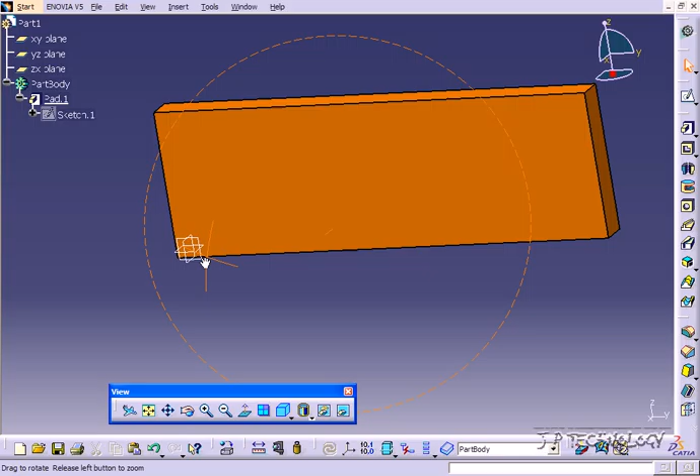So in this case, what we're going to do is we're going to cut into this plate, and then we're going to use the edges to pattern along, and then we're also going to create a sketch, so just one sketch line across here, to also pattern along. So to start off, let's create our first feature.

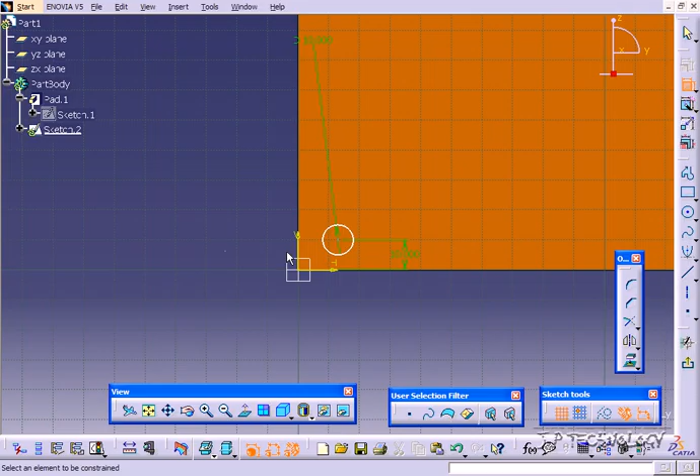So let's click this face, click Sketch, and let's sketch a circle. So just click, sketch a circle in the middle, and let's dimension this to 10 millimeters. And let's position it in the bottom left corner, and we'll dimension it to 10 by 10 from the edges. So from this edge to the middle, make it 10, and from the vertical edge to the center, we'll make that 10 also.

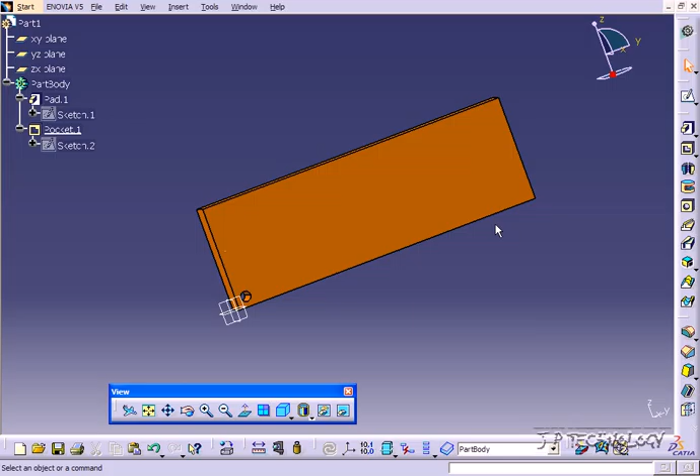So now that we have our sketch, let's exit the workbench, and now let's use the pocket feature to cut it out. So click Pocket, click the sketch we just made, click OK, and now we've made our first feature that we're going to use to pattern. So we're going to take this feature and we're going to pattern along this edge here, and that's going to be our first pattern. So let's click Insert, Transformation, Rectangular Pattern.

So now we have the rectangular pattern definition box, and you can see that we have a few things we need to fill in right now. So the first one I'd like to put in is the object to pattern. So click on there, and you can either select by clicking on it in the part or clicking on it in the tree. And I think clicking from the tree is a lot easier because you won't be clicking on another part by accident, and it's a lot more precise. So let's just click the pocket.

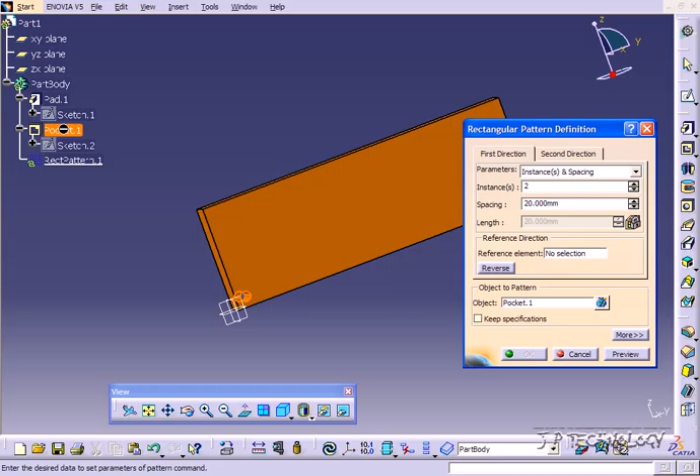Now for the reference direction, we're going to have to choose a line to pattern along. So we're going to do the bottom edge here. So let's click this bottom edge here. And you can see that from the rectangular pattern and the settings that are already in the definition box, it's made another feature right beside it.

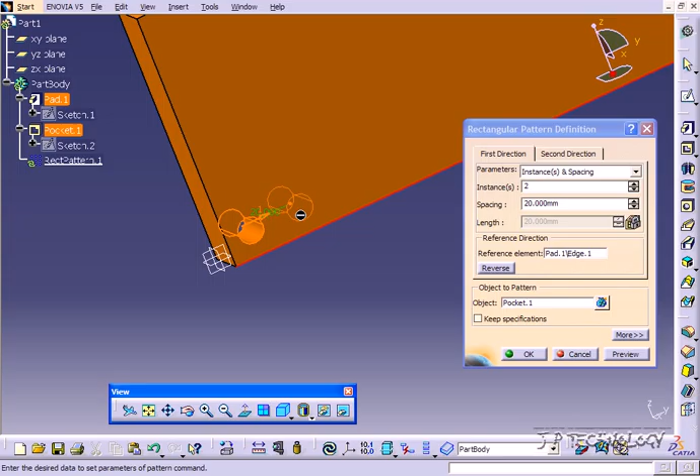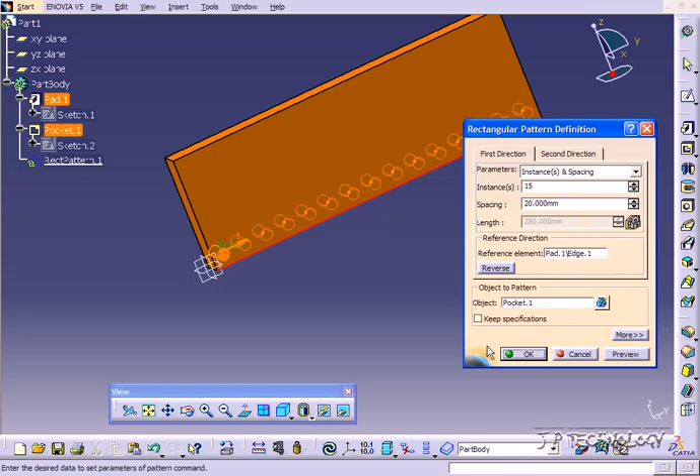So right now the instances are at 2, and what we have to do is keep going and increasing them. As you increase the instances and the spacing between each instance, the pattern grows. So let's put this to 20, and let's make 15 instances. Click OK, and you can see that it runs all the way across. Click OK again, and now we have our 15 instances, and we have our rectangular pattern going along the bottom edge. Now let's do the same thing, but let's go on the vertical edge here.

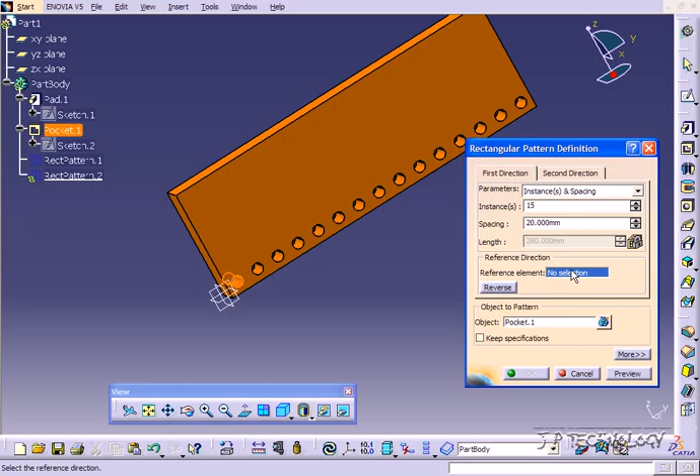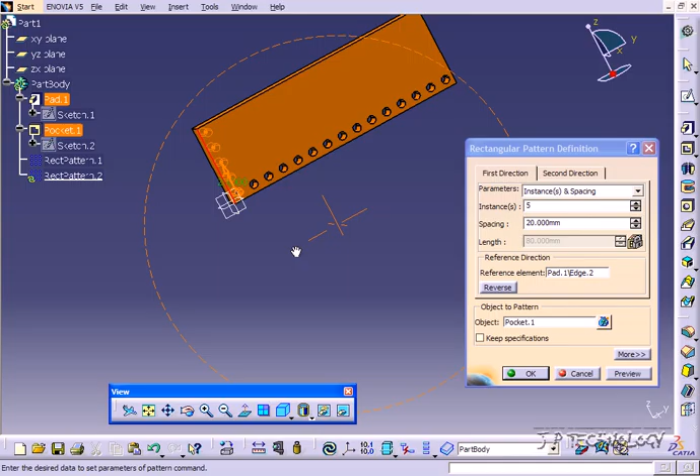So let's click Insert, Transformation Feature, click the rectangular pattern. Now let's choose the pocket again, and let's choose the reference direction. We'll choose the vertical edge here, and you can see right now in the preview it's going in the wrong direction, so we're going to have to flip it. So you can either flip it with this arrow or flip it with this reverse button. So put it in the right direction, and we're going to need 5 instances. Click OK, and you can see the preview looks good. Click OK again, and now we've done it going on the vertical edge.

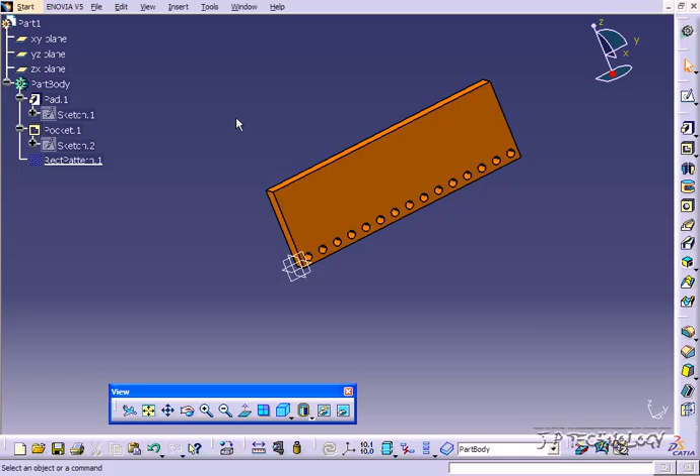Now if we delete this rectangular pattern, we can actually pattern an existing rectangular pattern also. So we're going to pattern all of these going up to fill up the whole plate. So let's click Insert, click Transformation Feature, Rectangular Pattern, and our object to pattern is going to be the first rectangular pattern, and the reference direction is going to be the vertical line.

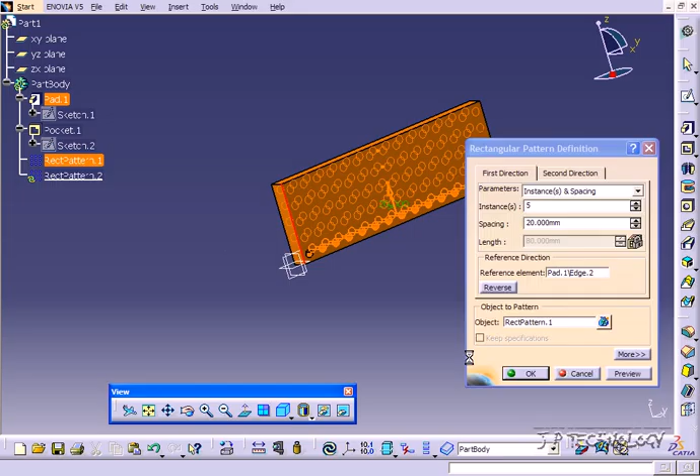Let's reverse the direction, and it looks good. Everything's in the right direction, everything's cutting in. Let's click OK, and now we've cut into the plate using the rectangular pattern. So we've patterned an existing rectangular pattern to fill up the whole plate. Now let's delete both of these patterns.

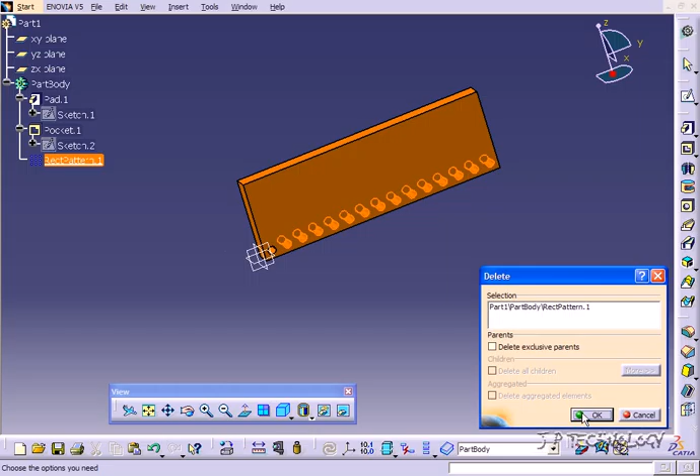And what I'm going to do is do that exact same pattern that we just did, but we're going to do it in one step. Click Insert, Transformation Feature, Rectangular Pattern, and let's choose the pocket.

Now let's choose the first direction, so we're going to make it go along this line. Now we're going to be choosing the second direction. In the first ones that we've been doing, we've only been doing one direction. So you also have the option to do two at the same time. Let's click the second direction.

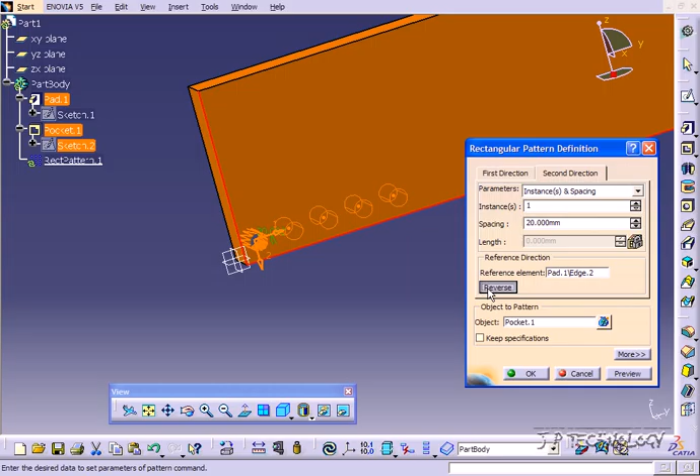And let's click this line here. We'll just reverse it and increase the instances to 5 so it goes all the way up, and we'll put these to 15. Click Enter, and you can see that just with one single rectangular pattern, we're able to go horizontally and vertically and fill up the entire plate. Now let's click OK.

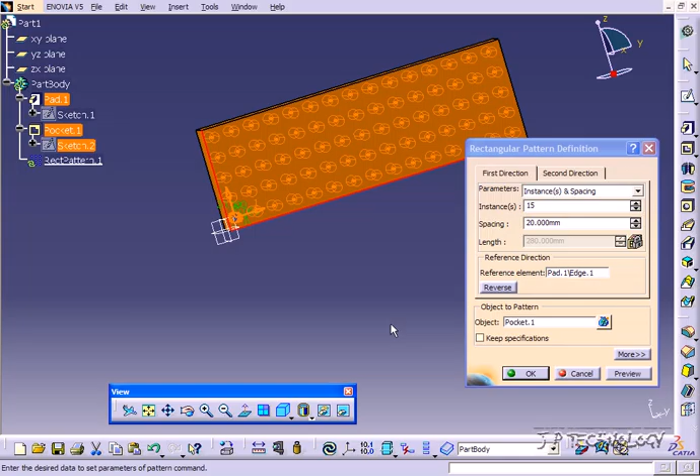And now we've done our rectangular pattern. From one feature, we've created multiple features on this one plate. So from the one feature, we've been able to use the rectangular pattern and pattern the entire plate.

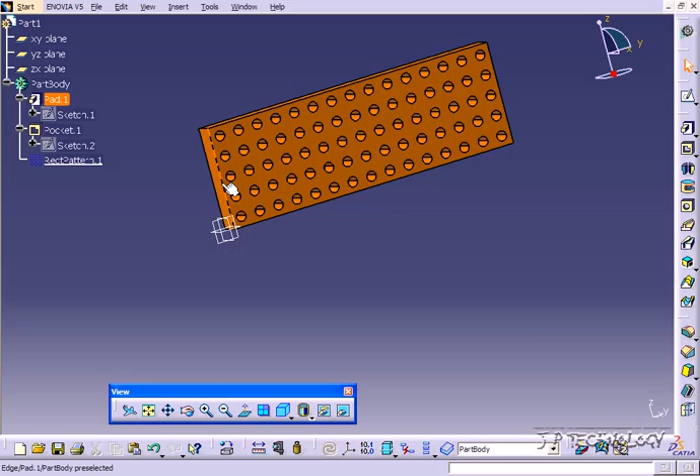Now, right now, all we've been using is the edges of the rectangular plate. So let's delete this rectangular pattern, and let's use a sketch as our definition line, so our path to follow. Let's click this face, click Sketch, and from the origin,

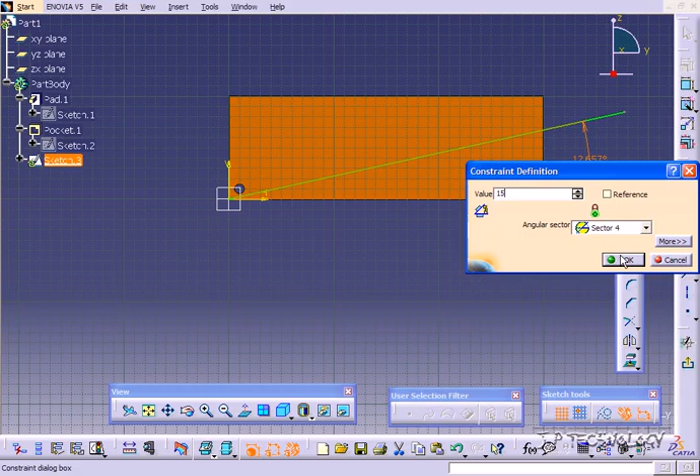let's just draw a line straight out, and let's dimension this with an angle. Right now it's at 12 degrees, so let's put it to 15 degrees. Click OK, and let's exit this workbench.

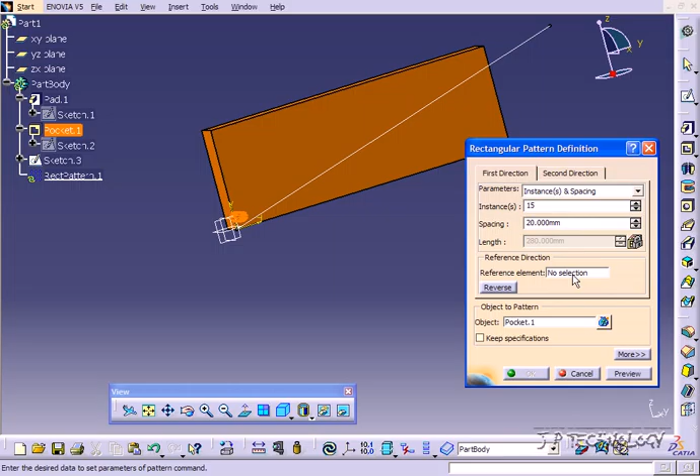Now what we're going to do is pattern along this line here. So let's click Insert, click Transform, Rectangular Pattern. Now we're going to select our pocket, and our reference direction is going to be this line here.

And you can see that rather than following a straight line, kind of like on a 90-degree angle, what we're doing is following this line that's on the 15-degree angle. Now we'll click OK, and we've made our pattern on an angle.

Now these angles, they have to be a straight line. It can't be a curved line, so it's not going to follow that. With the rectangular pattern, it's only going to follow a straight line.

Now we're also able to edit the sketch of the line. So by moving this line, it's going to move the pattern when we rebuild. So let's double click on the line.

Double click on the sketch, and let's change this to 20 degrees. Click OK. Now when we rebuild, everything with all the circles are going to follow this new line rather than the 15, and you can see how it's adjusted and moved up there.

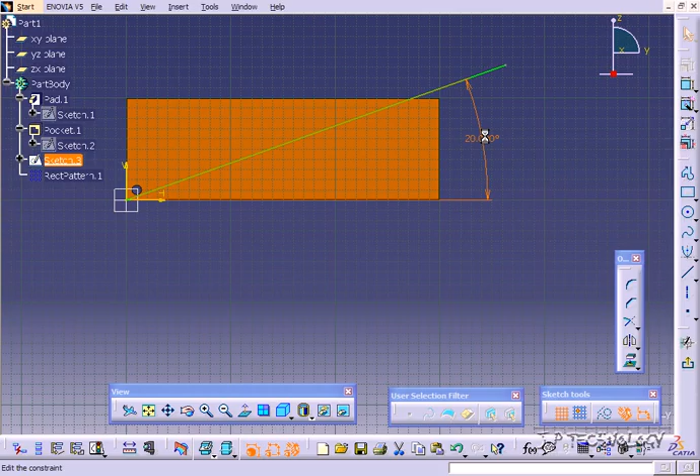Now let's double click on it again. Let's make it 5 degrees this time. Click OK, click Accept, and you can see now that all the circle patterns are going on that 5-degree angle.

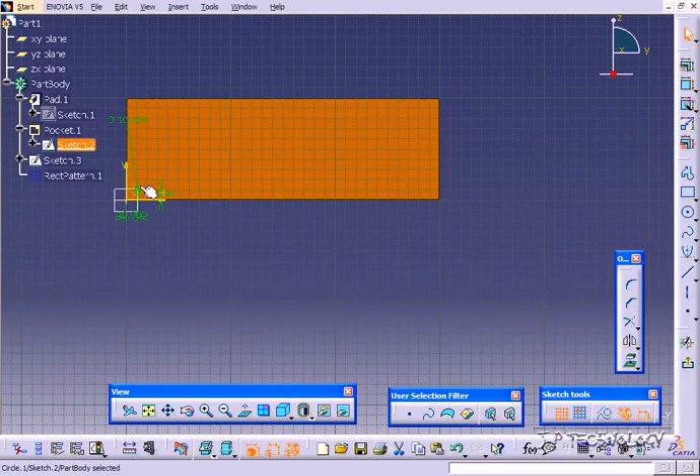Now if we change the original sketch, we're also able to change what the output's going to be. So let's just delete this circle. And what I'm going to do is draw a little square, and I'm just going to draw it around the center of that circle point there.

So I'm going to exit the workbench. And now you can see that rather than the circles, we now have squares. So you're able to edit the sketch from the original pocket or extrude that you made, and it's going to allow you to update your rectangular pattern automatically.

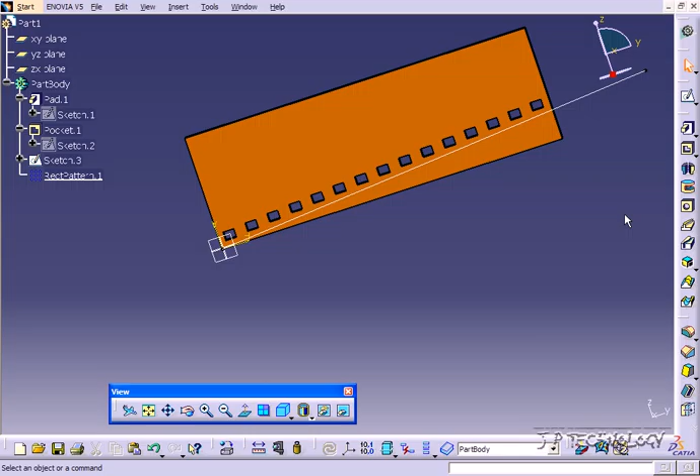So in this tutorial, we've gone through creating the feature and creating the lines that we're going to use to create our rectangular pattern. To do the rectangular pattern, you need the feature and you need the edge for it to run along. And that concludes our tutorial on how to use the rectangular pattern feature within CATIA V5.